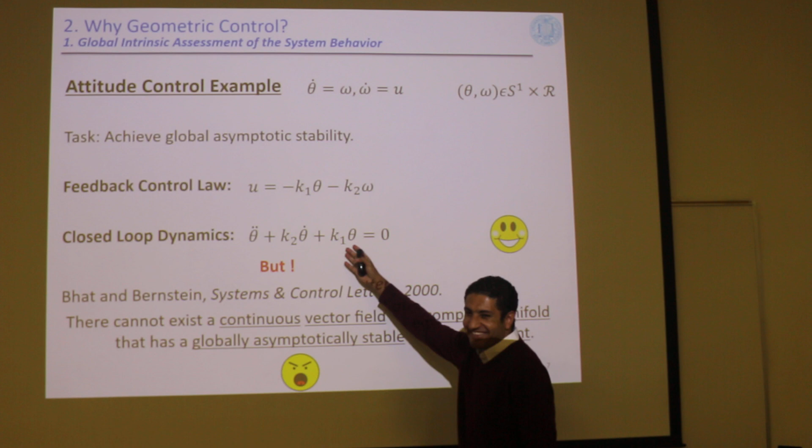But we did it in our undergrad, and this is very convincing. What went wrong here? What was the problem? Why can we not achieve that? I mean, we already almost achieved it. What happened? What went wrong?

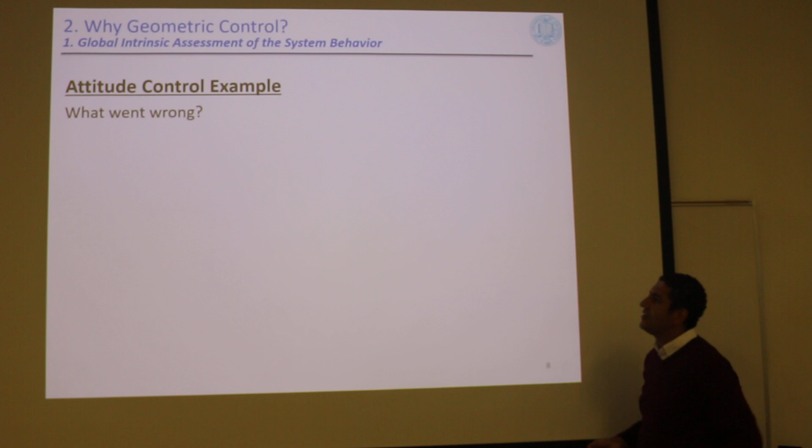This is the point. When you designed your control law in our undergrad, we designed as if theta is a real number. I just told you that theta really is not a real number. Theta belongs to S1, the circle line. So this control law is not well defined on the real state space, S1 cross R.

What do you mean not well defined? Well, this is a function. Control law, what's the definition of control law? Control law takes measurements, theta and omega, and gives you the control input that you need to apply at this time. So it takes theta and omega and gives you u. This is a function that takes 2 inputs and gives you an output. What do you mean by a function that is not well defined?

A function is not well defined when you give it the same point and get different answers. Whenever you give the same point, you should get the same answer. Otherwise, the function is not well defined, right? Okay, here is the thing.

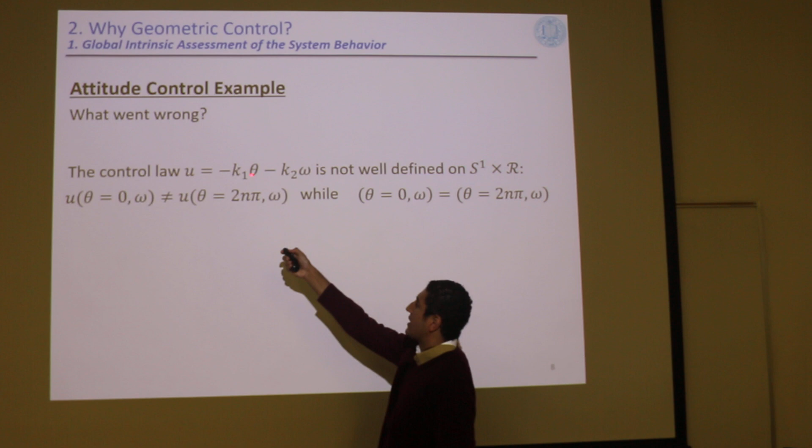This is a point in the state space, theta and omega. Theta is 0 and any omega, it doesn't matter. This point in the state space, theta is 2 pi and the same omega. These 2 points, theta is 0 and theta is 2 pi with the same omega, they are the same point on that state space. Whereas, obviously, if you plug in theta equals 0, or you plug in theta equals 2 pi, you'll get a different number for u, right? So indeed, this function is not well defined on the real state space.

It's well defined where? If you replace this guy by r, which is very subtle, but it will affect you. Okay, now we're a little bit convinced, but what will happen in reality? Still, you cannot digest it very well, because we really did it in our undergrad, thinking that we got the best result ever.

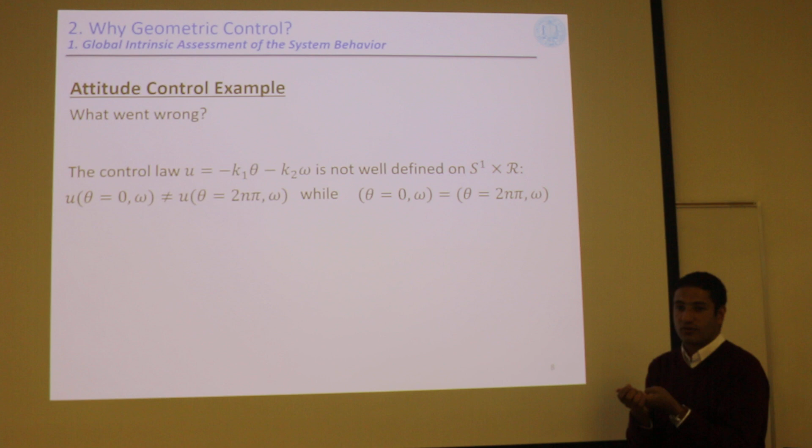What's the best result ever? This is the best result in control theory ever. It's globally, asymptotically, exponentially stable equilibrium. This is the best result that you can aspire for. Okay, now what we have, this is not well defined.

What we have is something called the unwinding phenomenon. This is your spacecraft or whatever, maybe give it just a little bit disturbance, maybe -5 degrees. It depends on the initialization of your measurement for theta. Your controller might think that this is really -5 degrees and do this corrective action, or it might think that it's all the way 355 degrees the other way, for which it will respond and come back. So you have just a little bit few degrees. Any smart controller will just give you this few degrees back. Your controller might confuse and go all the way to get to the other side.

Which means that we don't have a proof for mere stability, the Lyapunov stability. You know this hierarchy we have here, that's okay. You have Lyapunov stability, which is just mere stability, meaning you will not blow up. Then you have asymptotic stability, meaning I will not blow up, but I will even go to my desired equilibrium point. Then you have exponential, meaning I will go not eventually, but exponentially fast. And you have global, which is from any point in the space, I will go exponentially fast.

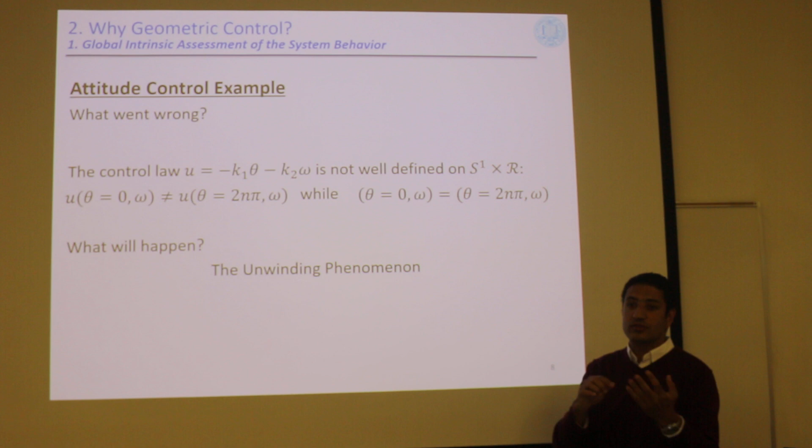We thought that we achieved the best ever, and now we lose the mere Lyapunov stability. We don't have mere Lyapunov stability. Why? Because my system is not bounded. You can give it just a 5-degree disturbance, and it will have like a 355 degree response. So this is the unwinding phenomenon.

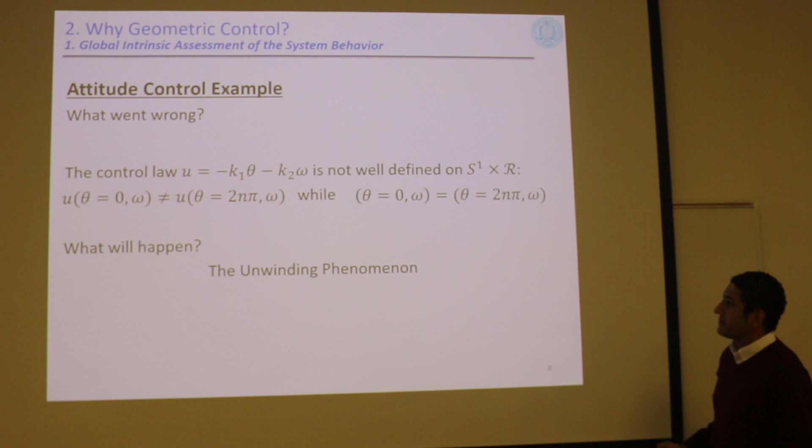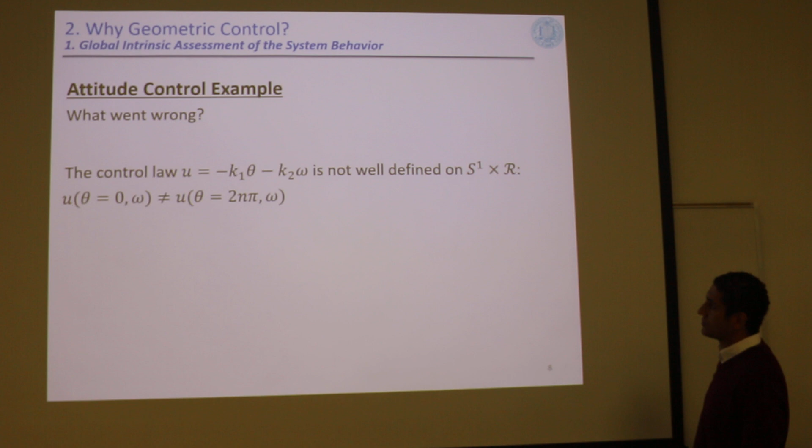Okay, that's okay. Let's see it for real examples. Spacecraft attitude control. What was the impact of this result? This result is recent, right? It is like 2000. Okay, relatively recent, because people tried to do spacecraft attitude control for a long time.

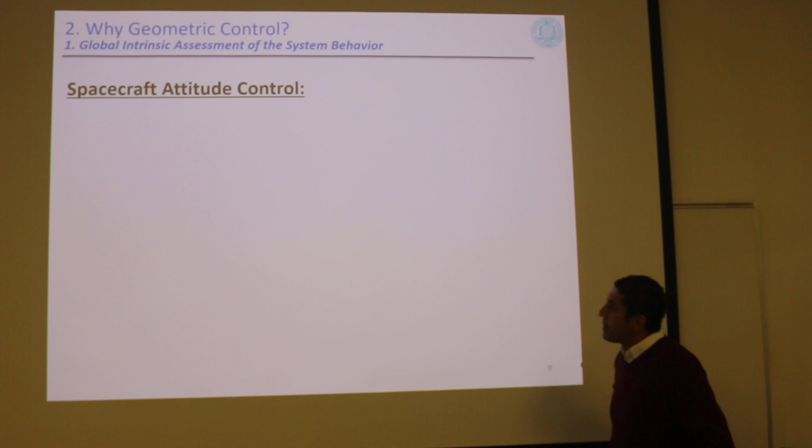How we write down our equations of motion sometimes confines the way you do control. So typically, for spacecraft we have just 3 degrees of freedom, right? And if we do that, how are we going to write down equations? Well, we have many representations, but one of the most common was Euler angles, which we studied in mechanics, aerodynamics.

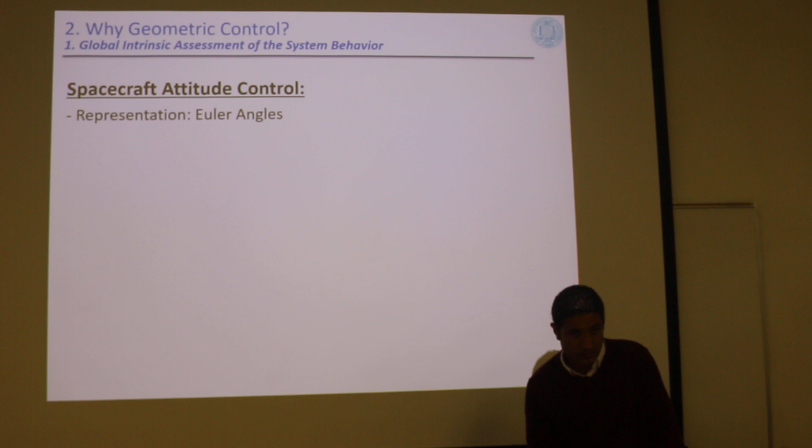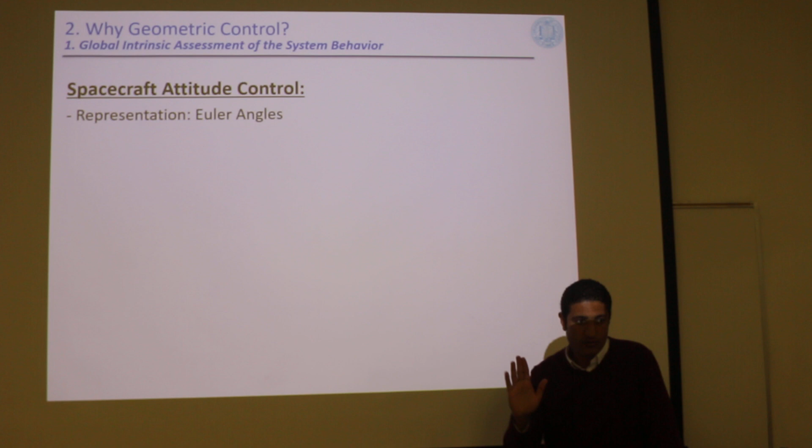Of course, the Euler angles, by definition, are local representations. We know that for any of the 12 representations of Euler angles, there's going to be always one singularity, right? For the common representation, yaw, pitch, roll, we have the singularity at theta equals 90 degrees, if you remember. So it cannot cover the entire state space. It's essentially local, and you will always have singularities.

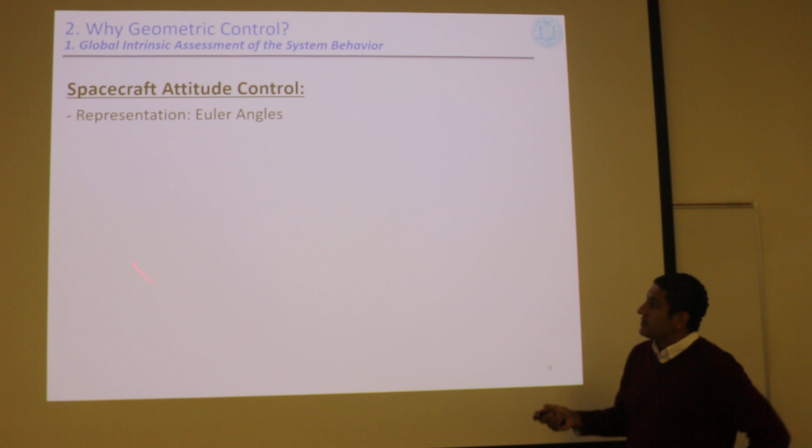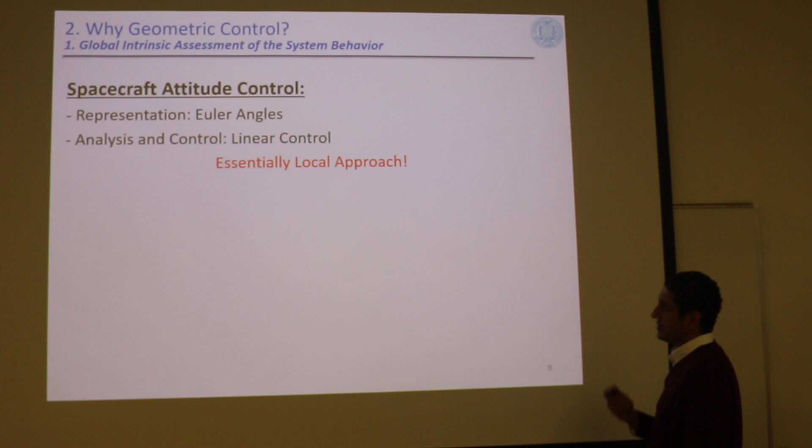So if we have this guy, we can do linear control on the Euler angles representation, and we're done. That's right, but this is essentially a local approach.

So then people, when they realize that, ask why don't we use quaternions? Because you can use quaternions to represent spacecraft attitude control. Instead of 3 Euler angles, you have 4 quaternions subject to one constraint. We didn't study it in detail in dynamics, you can go read about it. It's nothing fancy, but the good thing is that it removes your singularity, in the sense it can represent the entire dynamics of the entire state space. So it's a global representation.

Now we have a global representation. We hope to aspire for global results. But our linear control theory is essentially for a small neighborhood. Well, we have Lyapunov theory, which showed up maybe in the 50s or whenever, so we became mature at least. So now we have global representations, we have global theory. We can apply this to that and get global results, right?

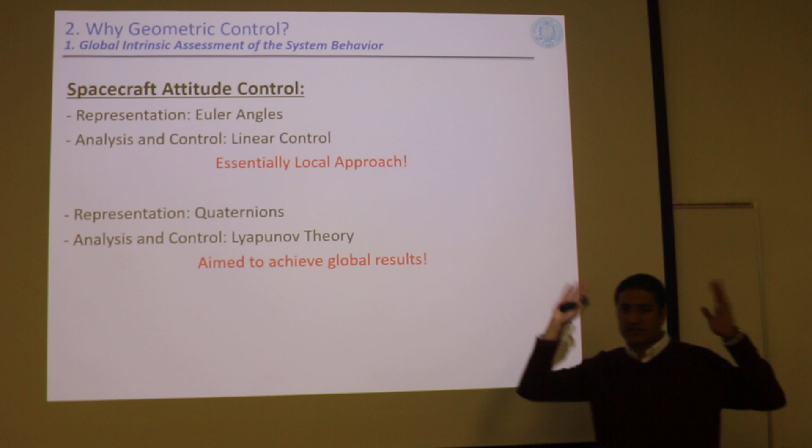And yes, maybe in the 80s or something, there are several papers in the most prestigious journals, IEEE Transactions on Automatic Control, under the title of Global Asymptotic Stability of Spacecraft Attitude Dynamics using Quaternion feedback, quaternion feedback approach to blah blah blah. Several papers in these very prestigious journals, but we just learned now that this cannot happen, right?

I mean, I don't care about your results. And this is the good thing about math, is that this is a necessary condition. You don't satisfy it, then I don't care what you did, I don't care what you did. Your system cannot achieve that, cannot achieve this very fancy type.

And yes, they were wrong, and all the ensuing papers from this point on, all the papers on spacecraft attitude control, even using quaternion, even using Lyapunov, have the title of almost global. We can never achieve global. Now all the titles have almost global asymptotic stability.

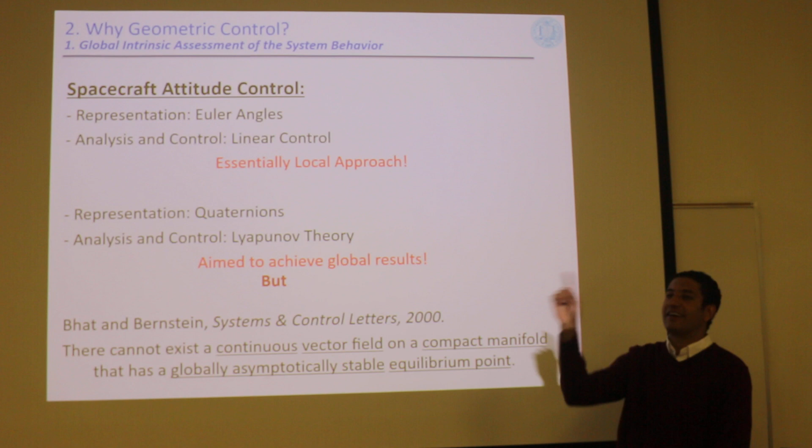It's an interesting result, an interesting story to tell, but you might think, well okay, we got it. I can solve this by having an if statement in my software saying I will restrict my measurement from negative pi to pi, and I'm done. I will not allow my controller to think that it's 355. Yes, but your controller will be discontinuous, right? Because an if statement means it's discontinuous. That's okay, you can get around it with an engineering solution.

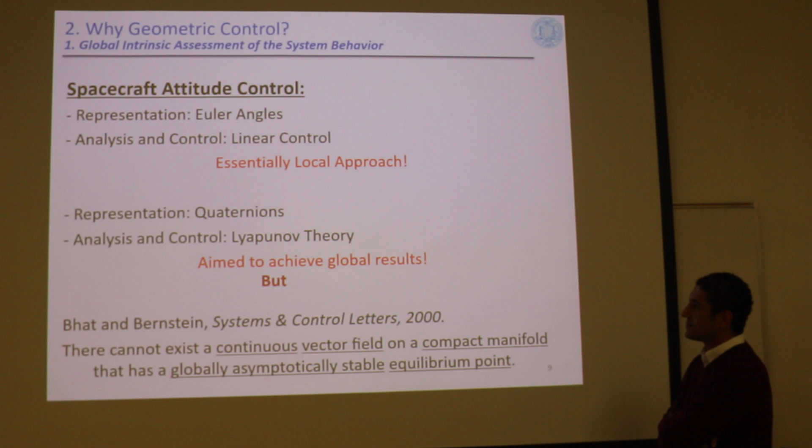I totally agree, if this is not the thing you'd like to learn, and it will not be the focus of our course. But this is one of the things that will allow you, when you have the language to read these papers. This is my favorite part, because even if we do local analysis, here is the point.

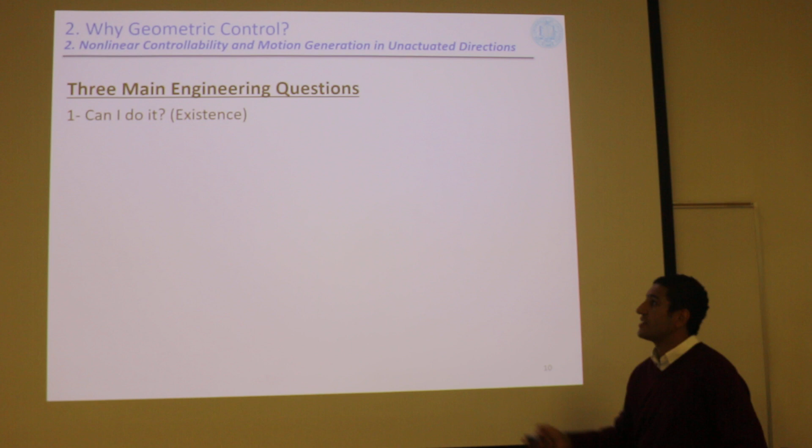We have actually 3 main engineering questions, usually when we design things, particularly controllers, or even not controllers, things in engineering. First of all, can I do it? Can I achieve it? Can I go from here to there? Can I design this thing? Does there exist a solution? This is why it's an existence question. Does there exist a solution to your problem? This first.

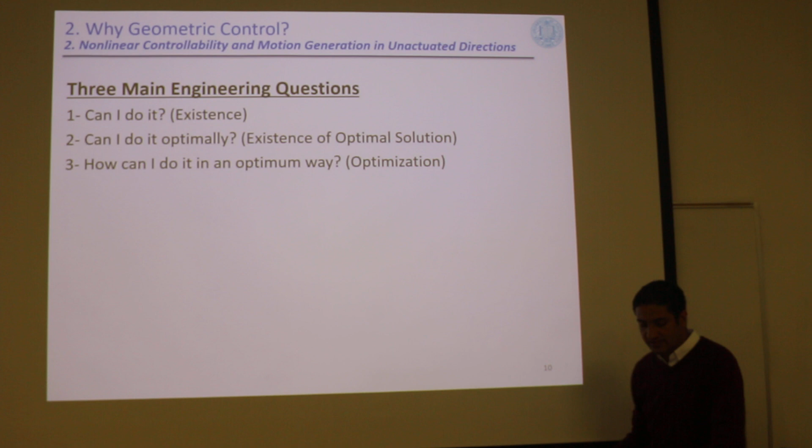Second, if the solution exists, can I do it optimally? Because we engineers, we like to do things optimally, right? So this is the existence of an optimal solution. Mathematicians care much about existence, we don't care, we jump here, how can I do it optimally? But you shouldn't waste your entire life trying to solve a problem that doesn't even have a solution. This is why existence theorems are really useful.

Does it exist? Can I do it? If yes, okay, can I do it optimally? Because the fact that you are able to do it does not mean you can do it optimally. It might mean there exists a solution, not necessarily an optimal one. If there is an optimal solution, then please tell me how to do it, and this is optimal control theory, or optimization if you're looking at general design.

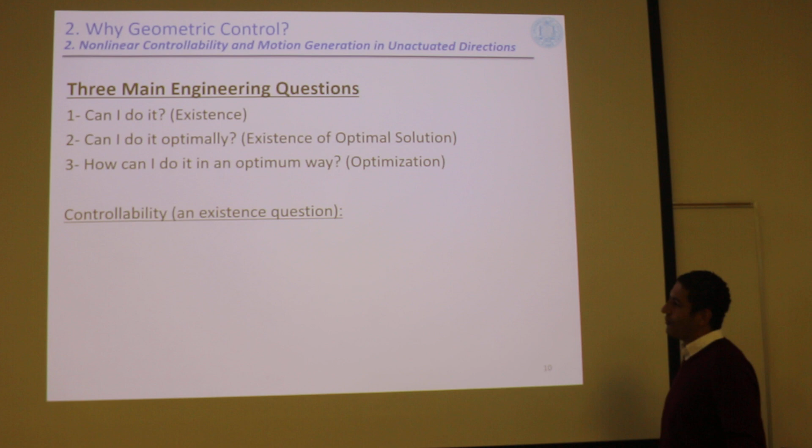So controllability, we're saying nonlinear controllability in the title, so controllability has to do with the very first question, existence. Does there exist a solution to your problem? Can I go from this point to that point in finite time? Can I go or not? So controllability is an existence question for linear systems.

So this is the definition: this system is controllable if there exists a control U that steers the system from any point to the origin, for the linear system. And actually, if you can go to the origin, you can go to any other point. So for linear systems, basically, it's can I go from any point to any other point?

Okay, how many of you guys did take 270A? Okay, because I mean it's not a requirement here, but it will be hard to appreciate the nonlinear control without it.